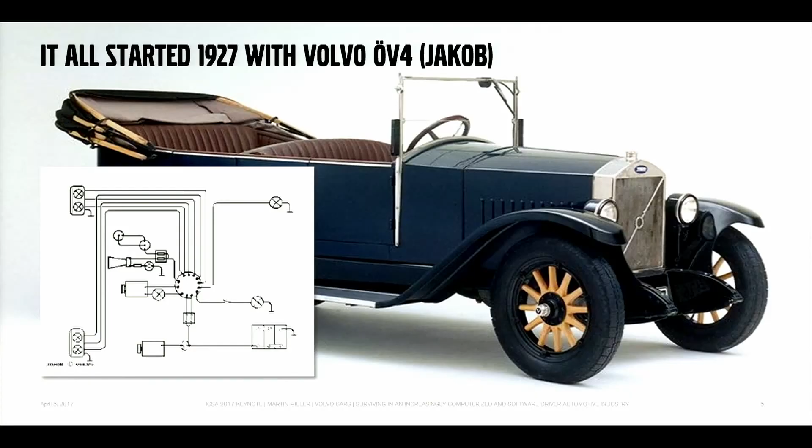If we look at the electrical system of this, it looks something like that - not very complex. Here you have the headlights, the horn, a battery, taillights, and some other small components.

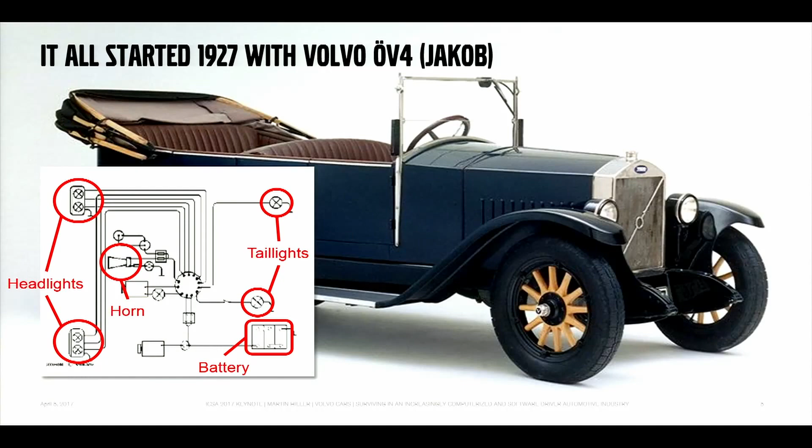There has been some progress since then. If we look at the computerization of vehicles from the 70s and onward, it has been quite a trip. It started with powertrain-related mechanical components, so the engine, the transmission, fuel injection - they were all computerized fairly early. For Volvo, it was somewhere in the 70s.

In the 70s, they were still single components, so there wasn't much communication between each other. In the 80s, there was some intercommunication between these, hardwired - we started to get cruise control, a more coordinated powertrain control. And in the 90s, we got traction control, so we started to computerize the chassis as well.

Adaptive suspension came along in those years as well. Then mid-90s somewhere is a kind of a flex point - that's where we introduced multiplex networking, so a modern network in the car. In this case, for Volvo, it was the first CAN-based vehicle network. From that point, things have just skyrocketed when it comes to computer control.

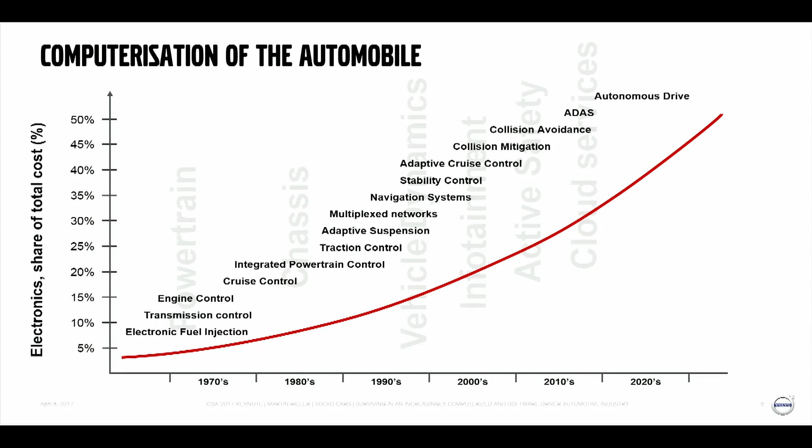The industry as such hasn't really kept up with this development. The management of the various automotive companies, they're still very much into the mechanical and mechatronic world. And all this transition to an electronic and software-defined product has kind of crept up on them from behind. But now we're actually getting into the next decade with a lot more confidence in that department, and I will talk to you more about that.

But first, I would like to place vehicles in a context, in the context of other software-intensive systems. I'd like to bring up those systems that perhaps people think of most when they think of advanced electronically controlled, computer-controlled systems: spaceborne systems and aeronautical systems. In the Space Department, we have the Space Shuttle, retired now, but still an interesting system to look at. We have the International Space Station, still active, and we have Orion, which is the replacement of the Space Shuttle, still in development by NASA.

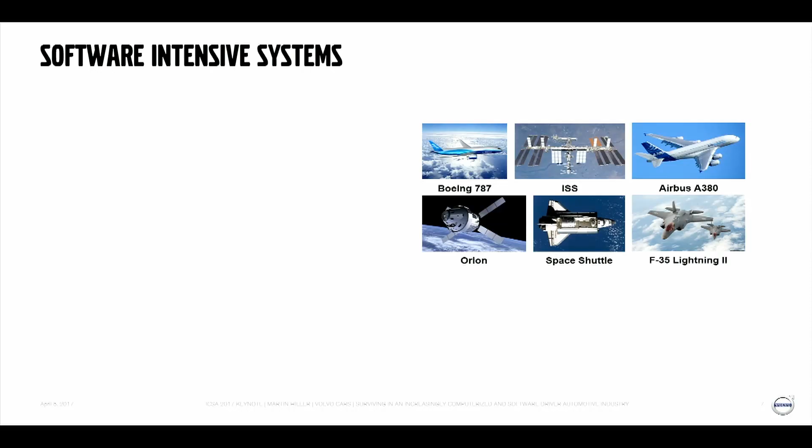On the Aeronautical Department, we have the flagship products from Boeing and Airbus, the Boeing 787 and the Airbus A380, their most modern aircraft. And from the military side, we have the F-35 Lightning, which has been deemed the most complex aircraft ever built - basically a computer on wings, as they say. So we'll see how a car fares to these systems.

I'm going to take a look at lines of code, without going into any discussion on whether lines of code is a good metric of size or complexity, but it gives you a kind of a ballpark of how big these systems are from a software point of view. So the first one is the Space Shuttle, roughly 400,000 lines of code. But it's an old system - it was built some 40 years ago. It's okay to not have that much software.

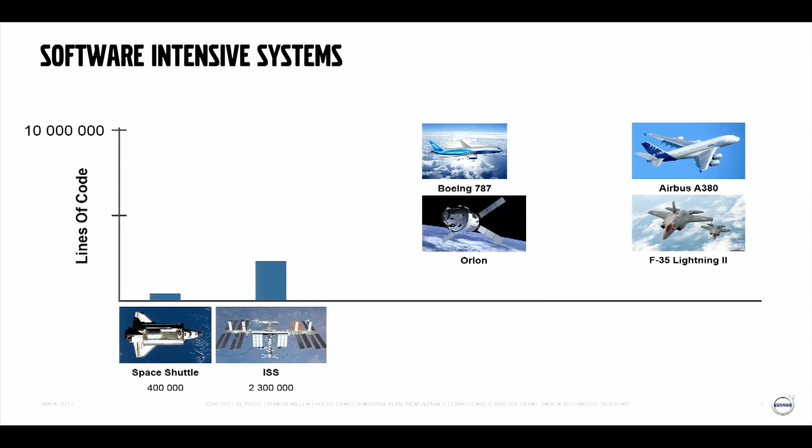The next one is the International Space Station, with 2.3 million lines of code - I think we'll have to change the scale there a little bit. That's the software that is keeping the International Space Station in orbit. It doesn't count all the experiments and all the other stuff that is up there - it's just the control software of the space station, roughly 2.3 million lines of code. Next one, Orion, also 2.3 million, but it's in development, so they still have potential to grow that, I guess.

So the spaceborne systems actually don't have that much software that is critical in those, which is probably good, because they're kind of tricky - not a good safe state.

Right, so we have the aircraft. The first one there is the Boeing 787 at 14 million lines of code. Now we're getting somewhere, but we'll have to change the scale a little bit more. So we have the two contenders for the top place here: the Airbus A380 civilian aircraft, or the military aircraft, the F-35 Lightning. I will not hold you in suspense any longer - the second place goes to the F-35 at 24 million lines of code.

So is this a tight race, or is it a clear winner? It's actually a fairly clear winner. 100 million lines of code. I'm not sure what they do with all those lines of code, but it's a lot of software.

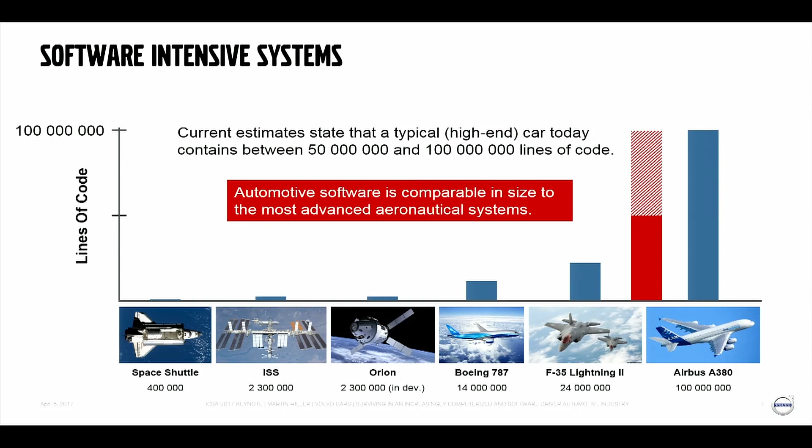Well, I hope that was kind of an eye-opener. Next time you get into a car, think about that.

If we look at how the software has evolved at Volvo over the past 20 years, I'm not going to look at lines of code, but I'm going to look at the amount that we download in the car. So this is downloadable software in the cars, and it looked something like this. 20 years ago, roughly, we had 1.5 megabytes downloadable code. So it fits on one of those 3.5-inch discs. It's almost kind of cute.

But we've seen over these years that every 5 to 7 years, which coincides with generational steps in the automotive industry, the software content, or at least the parts that we can download, grows by a factor of 10. So right now, if we were to include speech and maps information—this is not in the latest models, but if we were to include that—we are at 1.5 gigabyte downloadable data.

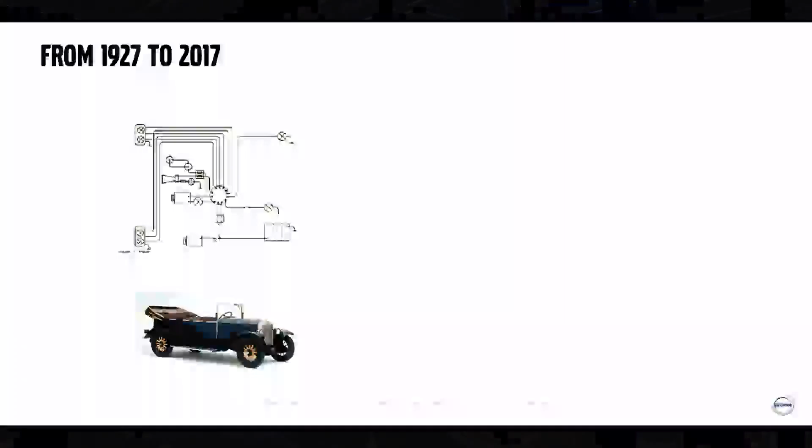So where does this take us? If we go back to 1927, this was the electrical system of the first Volvo. This is the topology that we have today, the 100 nodes and all the networks. But you know, this is not really an electrical schematic—these are only the high-level nodes and the high-level networks tidily laid out into a nice topology view.

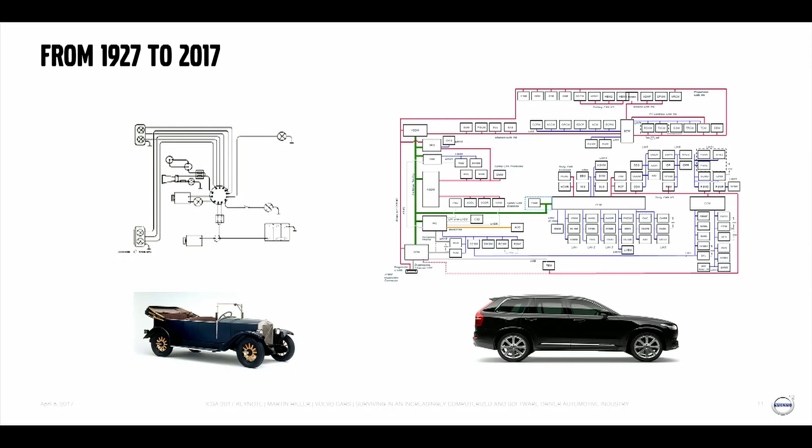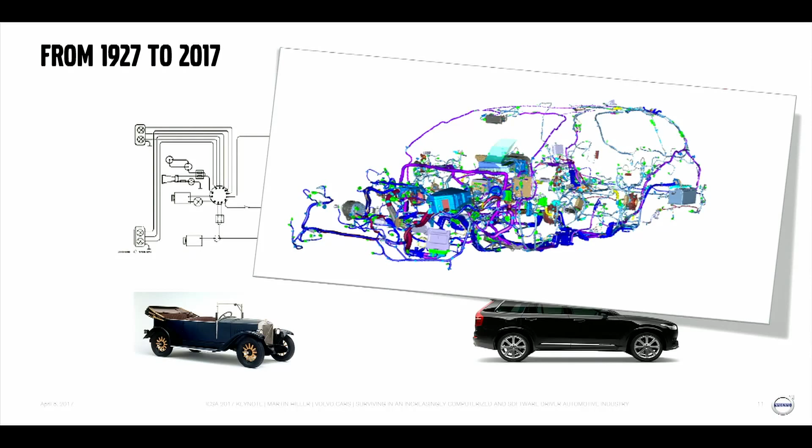If we take a look at the reality, it looks like this. You can actually make out the shape of the car by just looking at the cabling. That's kind of interesting. So it's quite a complex system that we're building, and it's just going to get worse.

So what is coming up next? Let's take a look at that.

Autonomous cars, of course. Volvo prides itself to be one of the main developers of technology for autonomous cars. We have, or we will have, autonomous cars running around on the streets of Gothenburg by the end of this year, is the plan. And that will then spread across the world, all in research projects, prototypes, so you cannot buy these yet.

But in a few years' time, you will be able to do that. So somewhere between 2020 and 2025, there will be the first autonomous cars available for purchase.

Connected cars. Well, the cars will be connected to the internet. I'll go more into detail about the implications of these things in just a few slides. There will be a very high bandwidth link to the internet from all of these cars.

We see that there are some new players coming that want to play in this area, players that don't have a background in the traditional automotive industry. And that's kind of interesting.

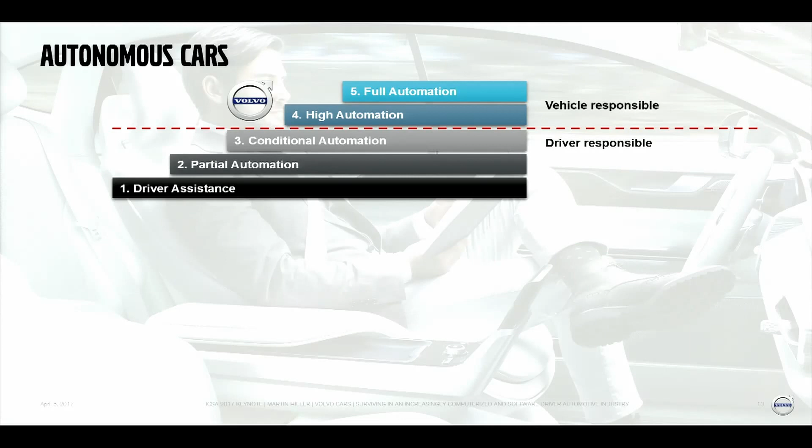Shouldn't be easy. And this is actually taking it one step further than our aeronautical friends. If we look at the autopilots today in aircraft, they don't relieve the pilots of any responsibility - the pilots are still responsible for what the aircraft does.

But we'll take it one step further, so it's a bit of a challenge. Not everyone has really grasped what kind of a change this actually is. But we're getting there. So what does this mean for the technology?

Well, we have lots of sensors. I think in the prototypes we have some 30 different sensors that, with different technology, read the surroundings of the cars. We have cameras, we have radars, we have LiDARs - that is laser scanners - we have ultrasonic sensors, lots of different sensors that provide data of the surroundings of the car.

So that amounts to huge amounts of data, and all this data has to be sent quickly to the processing algorithms that try to make any sense of this. So of course there will be a need for a lot of communication in those cars.

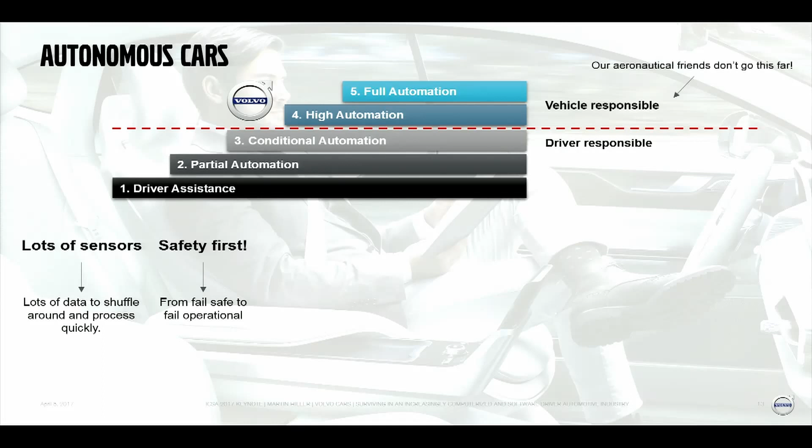That's not really something we can do when it comes to autonomous cars. We have to go to a fail-operational state, so the electronic system and the electronic control has to be available at all times.

Cloud communication. Lots of information will be exchanged between the autonomous cars and the cloud. We will download, for example, a very high definition map of the surroundings. This is not your ordinary navigational map. It's more of a map that shows the sensors what they should see, so we can compare what the sensors see with this high definition, almost point cloud map of the surroundings. That will help us pinpoint exactly where the vehicle is.

We'll download lots of traffic info, real-time traffic info, and we will upload vehicle behavior. We will upload what the vehicle sees around it, the surroundings and the environments. There's a lot of data going up and down.

And for that, of course, we want to have fairly high security in place. You don't really want to get this car hacked and controlled by someone somewhere else. That would be quite scary.

There will be lots and lots of logging in these cars. Remember, I said that the driver is no longer responsible, but we are. And of course, we want to know what actually goes on in these vehicles. So if something should happen, we want to know exactly what happened. So there will be lots and lots of data logged on what the vehicle does and also on what the driver does.

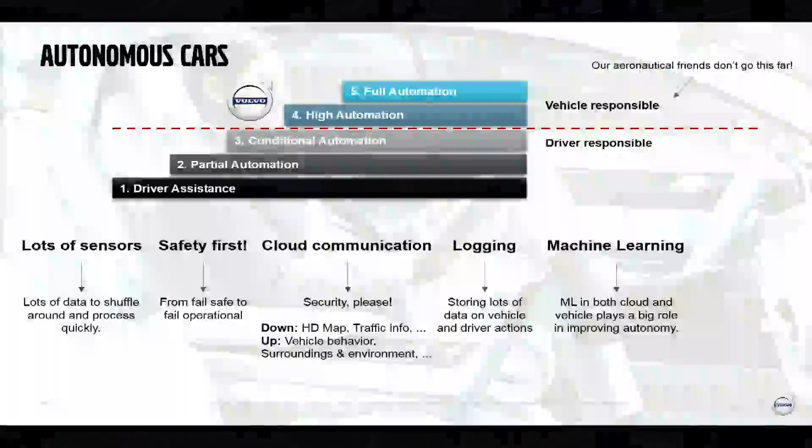Machine learning. We've come to a conclusion that in order for these algorithms to adapt and learn how to drive a car, we will have to employ machine learning at some stage in the development. This does not mean that the algorithms themselves in the car will be machine learning algorithms that adapt to how you drive. It's more like the way we analyze how vehicles behave that will help us get information on how to better develop these autonomous algorithms.

So machine learning will play a big role in future cars. And that's not only for autonomy.

Software update. The best way to get quality, safety and security is to be able to quickly update the software if you find something that is wrong. In a traditional car today, that's not really possible. You get maybe a software update when you take your car to the garage for some service or maintenance.

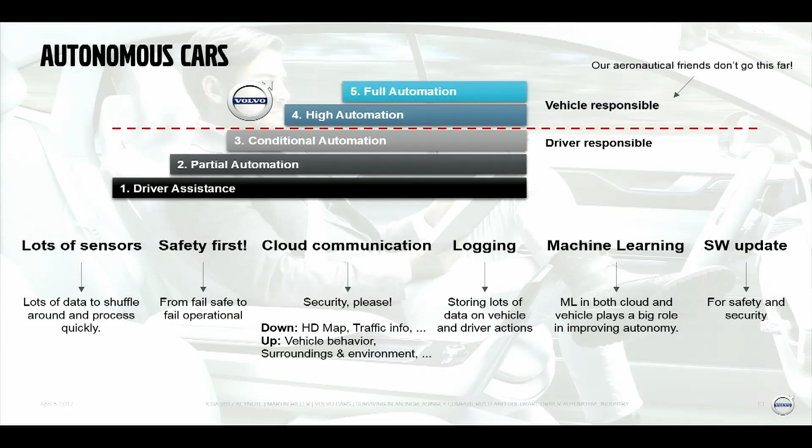There are a few exceptions, notably Tesla is very far ahead in this game, so they have over-the-air updates of their cars. But it's something that we still have to work on a little bit.

So looking at the connected cars, we see that the car will be more or less an extension of your digital self, or your living room or your office or whatever. The connection to the internet has to be stable, has to be transparent, and you will have lots of different services that make use of this link. Of course, entertainment, watching movies, listening to music, all that kind of stuff.

Safety information, you want to get information on what goes on in traffic around you. Are there any accidents? What's the weather like ahead? Are there any spots that are a bit slippery? All that kind of information.

You want to really personalize your car, so you want to have your own settings, personal settings, your own services, all those things that you have on your phone. You really want to have these mirrored onto whatever you have in your car as well.

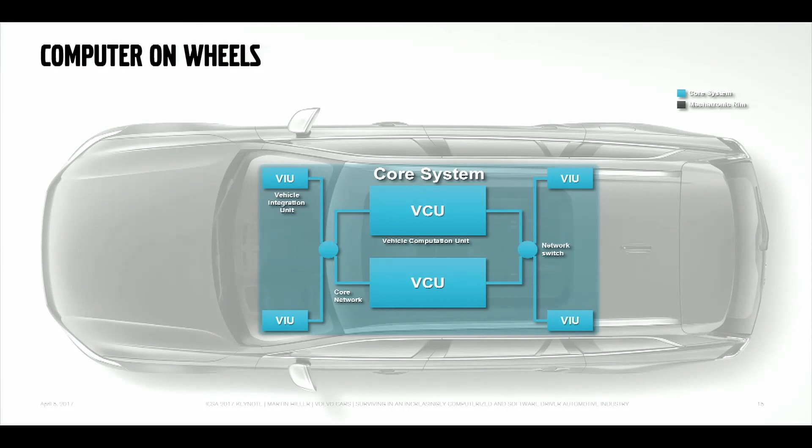And these core components, they will be connected in a high bandwidth network, which most likely will be an automotive flavor of Ethernet. So in the first generations, maybe 100 megabit Ethernet, but fairly soon we will get up to gigabit speed in that network as well.

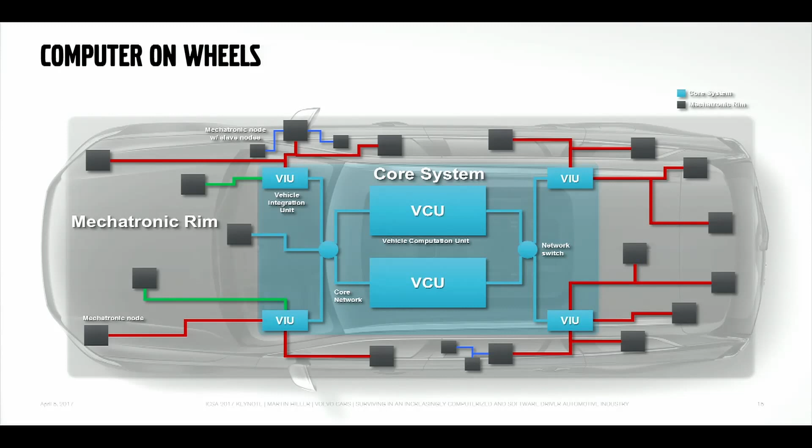And around that, we will have the more classical automotive electronic units. So these are the units that control the engine, that control the brake system, that control your steering column, that control your doors, your windows, your seats. All these basic mechatronic capabilities will be connected to one of these integration points. So it will be basically just like plugging in your mouse or your external DVD player into your computer. It's the same kind of a principle. So we have a number of peripherals in the mechatronic rim, and then we have the core system that kind of provides all the high-level functionality.

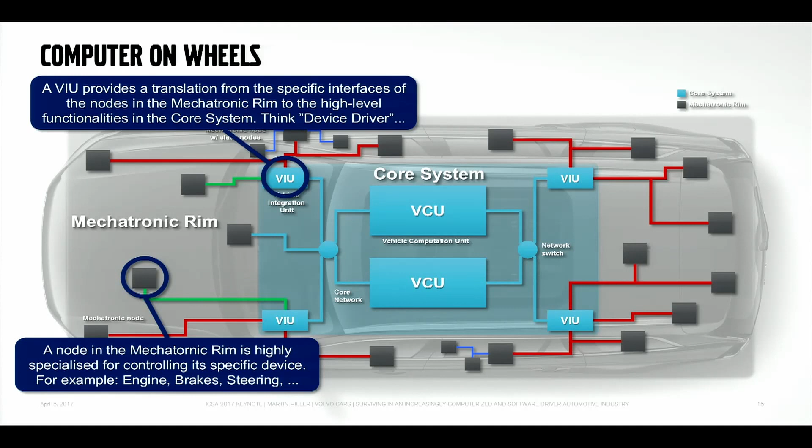So these will be the specialized, specific control modules. Here we have the interface modules, basically like a device driver in your computer today. And this is where we have all the vehicle-wide management, vehicle-wide coordination, all the functionality that kind of faces you as a customer and makes use of all the mechatronic, the basic capabilities in the mechatronic rim.

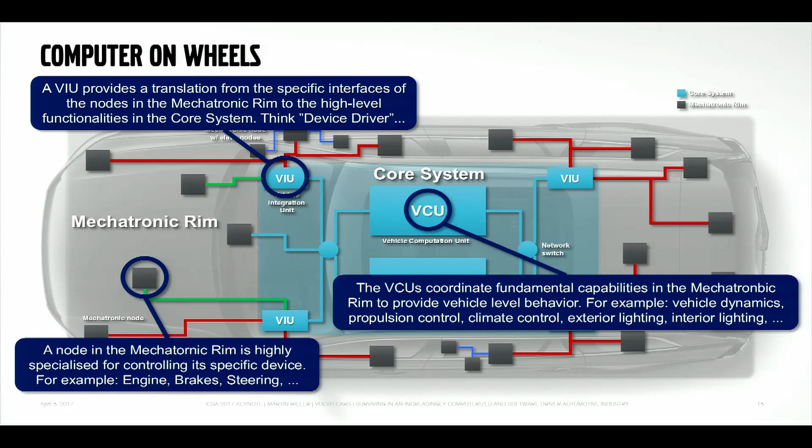So going into some more details about the core system software stack, we see that there is a necessity to have different operating systems depending on what kind of functionality you want to put in that core system. So one way to enable that is to have at the foundation some kind of a partitioning kernel, a hypervisor of some sort. Most likely a type 1 hypervisor, a very thin layer of software that provides this partitioning of the resources in the core system. And in each partition, we can then place a more high-level operating system or a software platform that is most suited for that kind of application or that kind of functionality that goes into that partition.

Since we have this tight partitioning in place, we know that each partition gets its share of the resources. So you will have the computational power that you were promised, you will have the memory that you were promised, and all of that will help us decouple the development of all these applications, all these software stacks that have to be integrated onto the same hardware.

Without this kind of partitioning, I don't think it would be feasible to have all the software in one system. This partitioning also enables us to place software with mixed criticality on the same hardware. If we wouldn't have had this partitioning in place, the highest criticality software kind of transforms or colors or poisons all the other software stacks as well, so we'd have to develop everything to the highest level of criticality in the system. So this is really a key piece of the puzzle to have this partitioning in place.

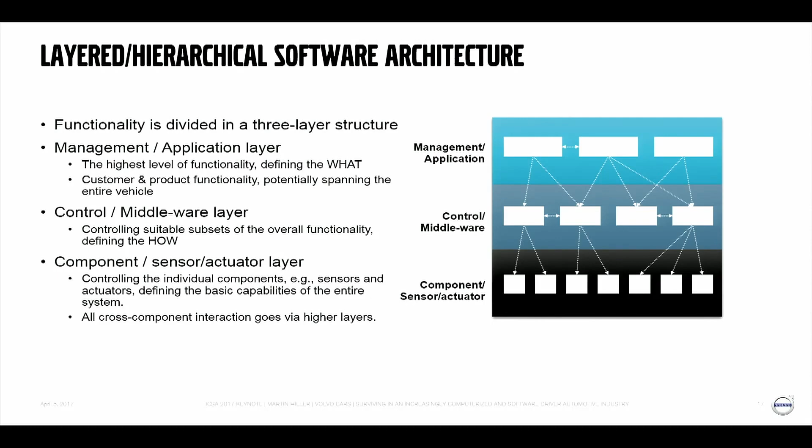Something that we have today that kind of hinders us in the evolutionary pace is that we have crosstalk on the component level in the lowest layer, which is kind of a big no-no, really. But we do that, and we see the consequences of that. That's something that in the next generation we really want to get better at, to shape up that kind of part.